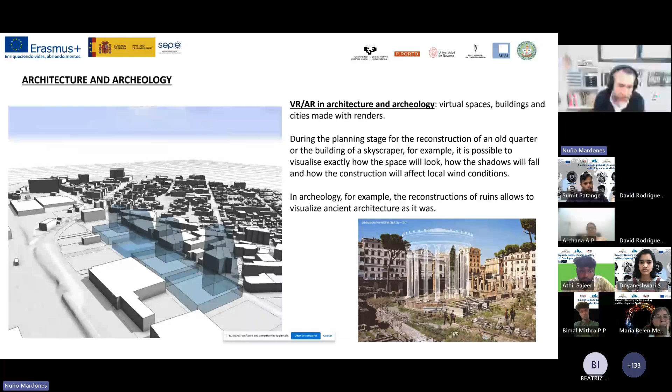As you can see in the left image, we can put new buildings in an existing urban context, and it's obvious that we can walk through this new street, this new development, and see different aspects like the sun on the street, the shadows that buildings cast on the street, and the buildings of the surrounding environment. We can experience and analyze these different aspects.

But this is just an urban design option - just the design of the buildings in an urban context. Of course, in the case of archaeology, or ancient cities, we can reconstruct buildings or parts of the city, and visualize this architecture and this part of the city as it was in the past.

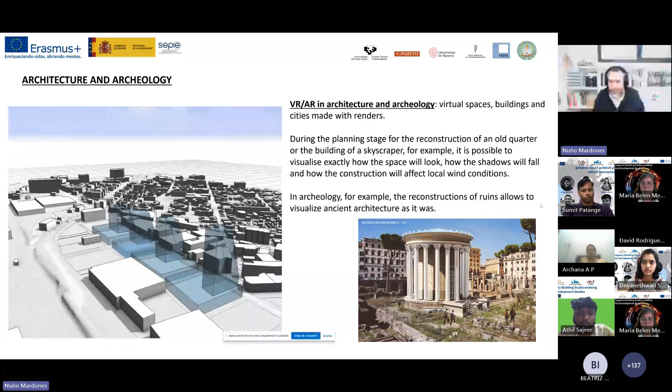So this is, I think, the most general possibility that virtual reality offers to urban planning. The other usual possibility it offers is the management or creation of smart cities.

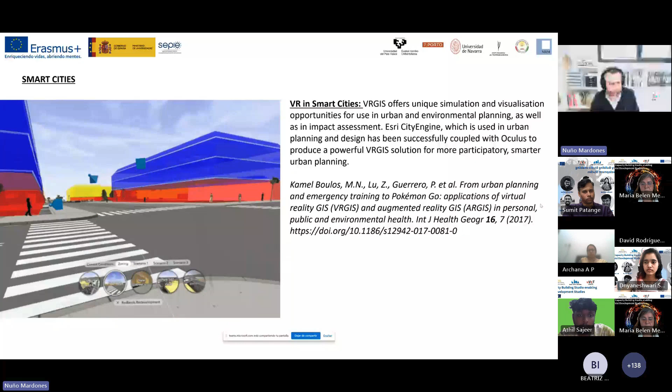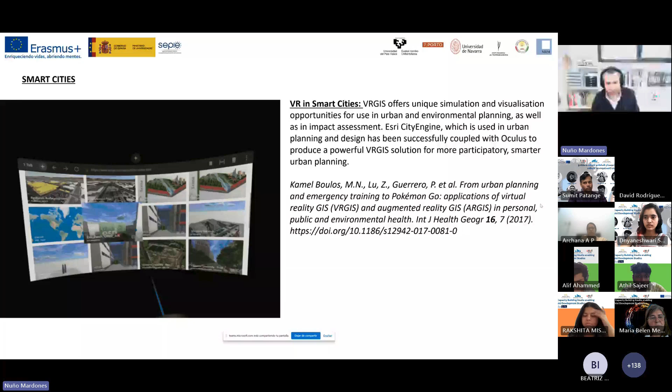In this case we have one technology I'm going to show you, the GIS system, because the GIS system offers new possibilities. It's not just the design of an area, or the design of buildings in a concrete area - it offers the possibility to overlap different information about this environment, and this also allows us to simulate and visualize part of the city, taking the point of view of different aspects.

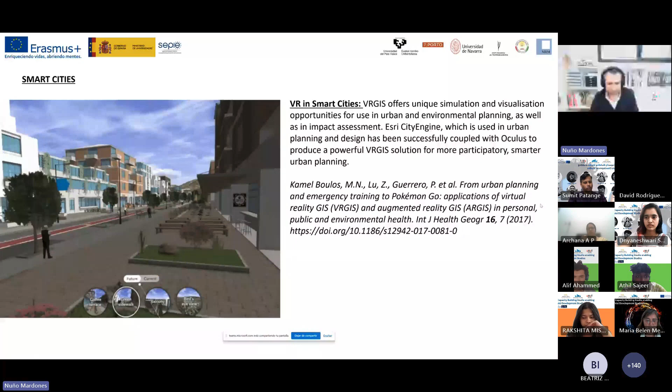So this is the part I'm trying to explain to you in more detail, because I think it's the most powerful possibility that virtual reality offers to urban and territorial planners.

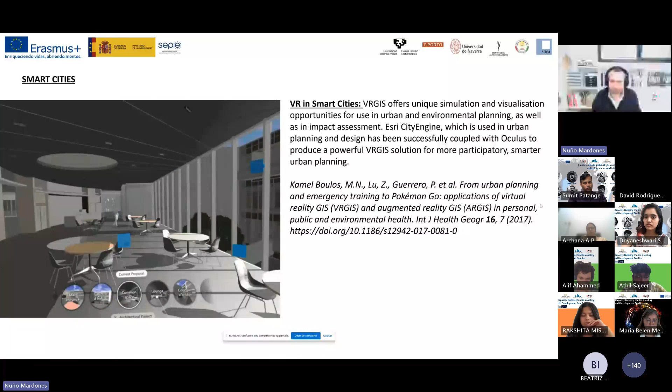One of the most important things I'm trying to explain is that, as many of you might think, architectural design and urban design are not the same. Urban design is not just the simple sum of different buildings put into an urban layout. Not exactly - urban spaces or cities are more complex, with much more circumstance than a simple sum of different buildings.

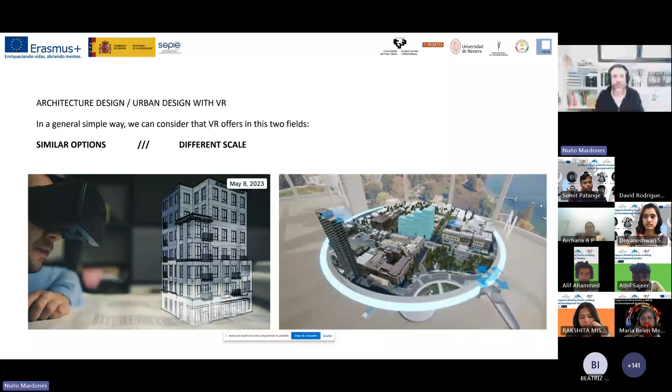So virtual reality offers a similar option, but at a different scale - it's not exactly the same. In the case of urban planning, virtual reality offers much more possibilities for visualizing, analyzing, and understanding the urban context.

This is because we can create new urban developments and experience how that could be - we can experience the life in these areas.

And of course, this offers the possibility of making decisions with more data, and in this way there are aspects I think it offers for urban planning that it doesn't offer for architectural design. One of these is the improvement of decision making with much more information - not just information about the building aspect or the shape aspect of the city, but more information about the management, about the uses of the different parts of the city, etc.

The second thing is that it encourages citizen participation. In our days, citizen participation or public participation is a really important aspect of urban planning and urban design. So this encourages participation by offering more immersive possibilities of understanding how the future city is going to work - it's an important tool for these actions.

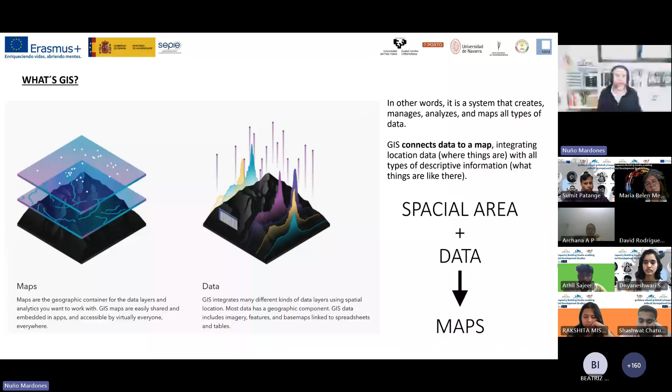This kind of program or software is based on the creation of graphic data. Graphic data are basically objects or spatial data, as you can see in the image on your left. This is spatial data, which could be a point, a line, a polygon, grid, etc. This is what traditional cartography offered us: object or spatial information.

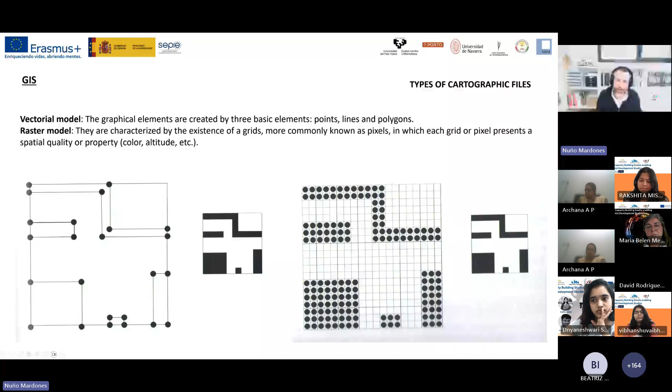This is a grid, and in each pixel or square of the grid, we can represent different spatial qualities or properties like color, altitude, temperature, etc. In this case, we have the grid, and we just have to color in black all the squares to obtain the final image. This is important because we can obtain all kinds of information in these two different models.

What I show you in this slide are two maps that we created in my office for a golf club in Spain. In the left image, we have topographical information. This topographical information is vectorial information, just a combination of contour lines with the different elevation of any part of this area.

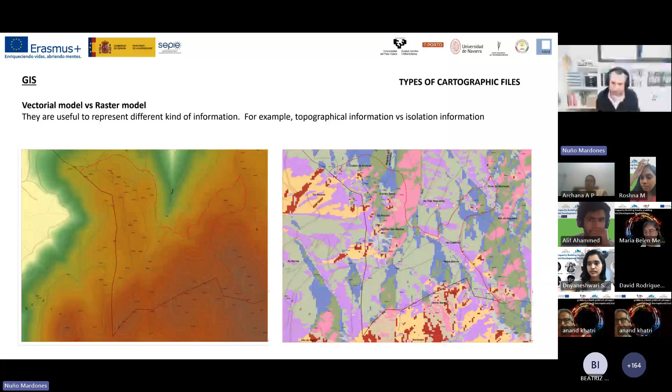In the right image, you can see isolation information. This isolation information is created per square meter of the soil, so this is a grid model. In each square, we have the information of the sun orientation, and we can combine these two maps in one file. This is another important thing that GIS models offer.

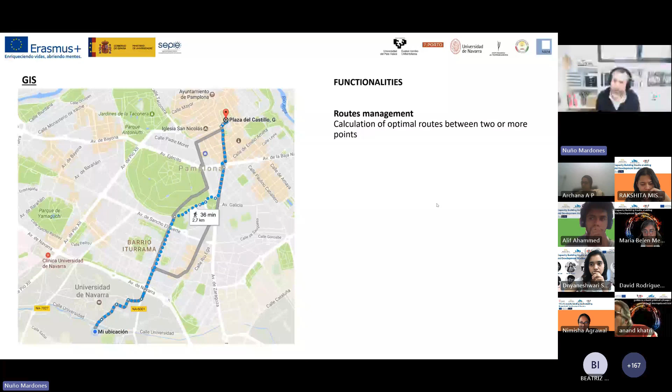Another possibility is the creation of models. This is the same example of the golf club in Spain, and we can generate a model to simulate the movement of terrain, where we have to remove soil, and in which part we have to put soil.

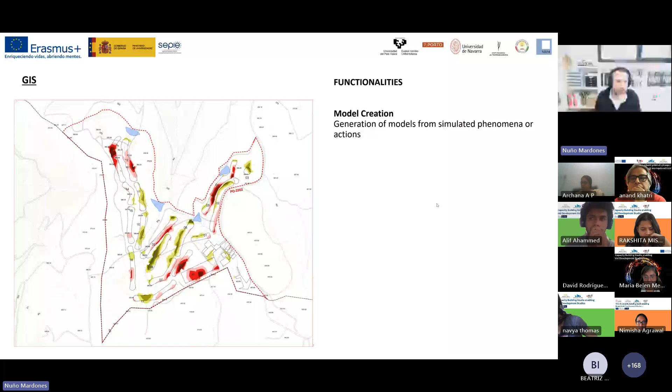Now, what virtual reality offers to this software is, I think, really similar to the options offered for architectural design. The first one is that it offers new ways of interacting with urban information, because it allows a much greater degree of immersion. All inhabitants could get inside these models and experience, in first person or bird's eye view, the new development of the city.

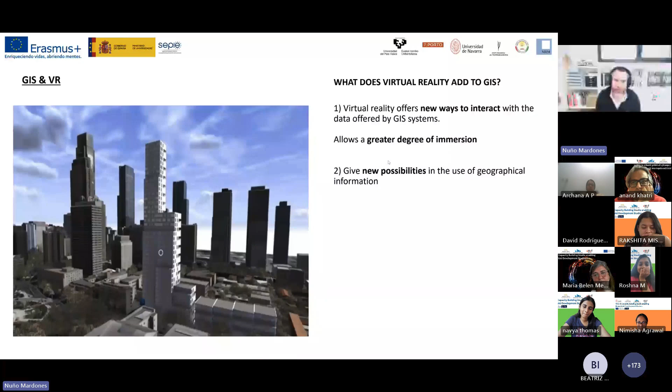So, of course, this gives new possibilities in the use of geographical information. One of these possibilities is not just designing information, it allows offering, analyzing, studying, and discussing data of different aspects, like social, economic, and environmental aspects, in different ways.

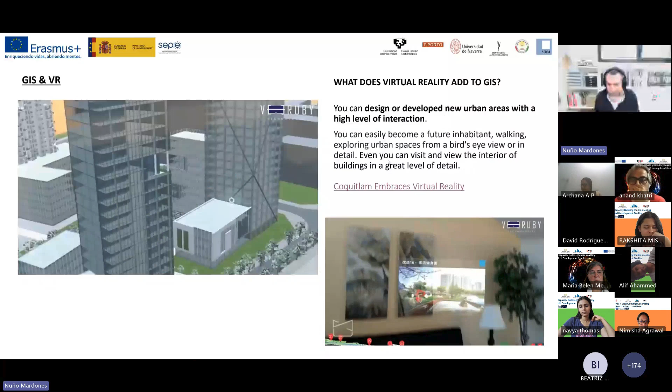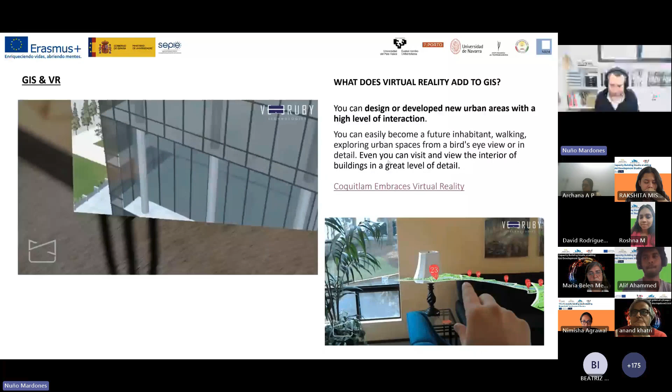Of course, you can design new urban developments, and in this new urban development you can add more information. You can add images, you can add information about the meters squared you can build, or a lot of things that you can explore with this combination of GIS system and virtual reality.

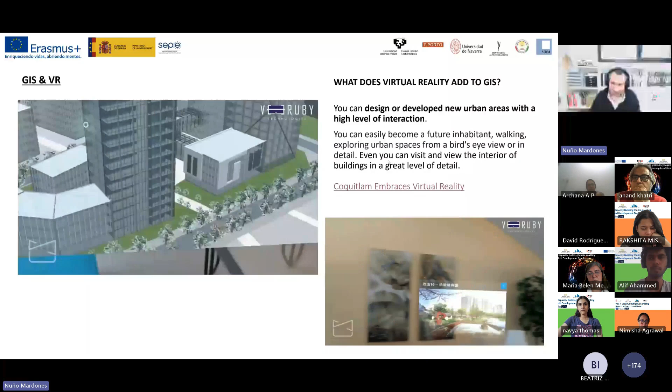Now I'm going to show you some videos about different options of this kind of technology.

There is no sound, Nuño. There's no sound. I think it doesn't matter because there is just music, so I can explain it if you want.

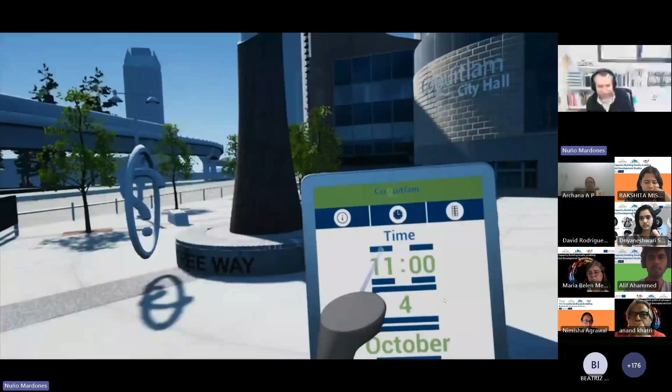This is an example of a Canadian city that used virtual reality for the creation of a new urban area. This is a video where they explain how this new part of the city is going to work.

Another important aspect is how this kind of technology can improve citizen participation in the process of urban design. I don't know about India, but in Spain and Europe, public participation is really important, and also, for example, in the British system, all new urban developments require a project that you have to create in combination with the inhabitants and with the local government.

So I think this is one of the most important things, because people have the possibility of understanding, in a really visual way, how this new part of the city is going to work. Now I'm going to show another video about a Polish city, about the implementation of this kind of technology in the process of new urban design.

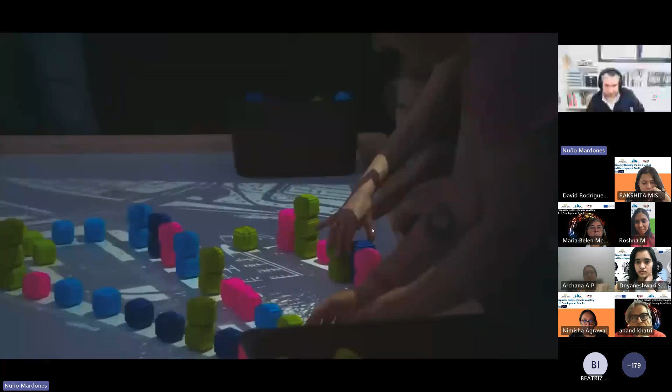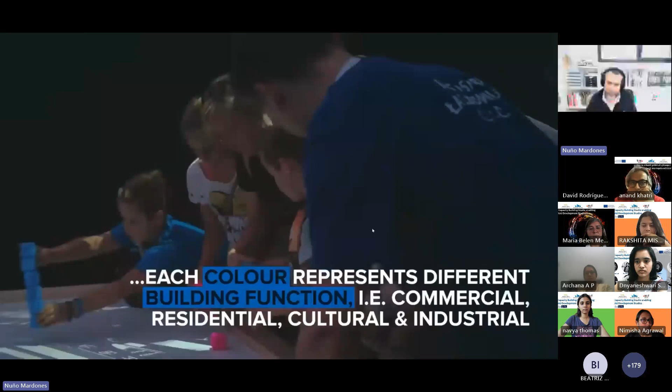In this case, as you can see, all inhabitants have the possibility to create the design of the city. There are different, I don't know how to say, different blocks. They can put the blocks in different zones and create the virtual recreation of this area in real time. So the virtual reality offers this kind of possibility.

I think we have to take this pretty carefully, because the people or professionals who know how the city is going to be designed are the urban planners, and we can have some problems if we leave the decision to the people.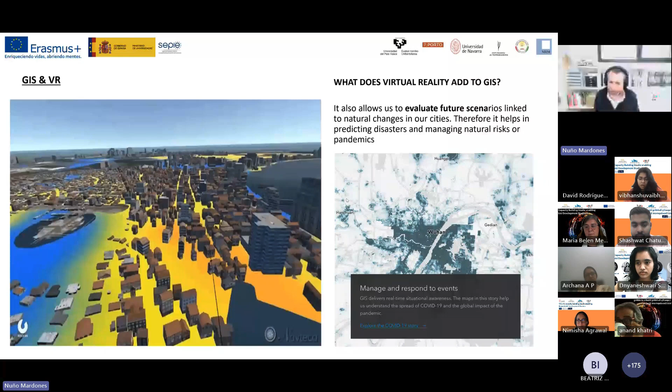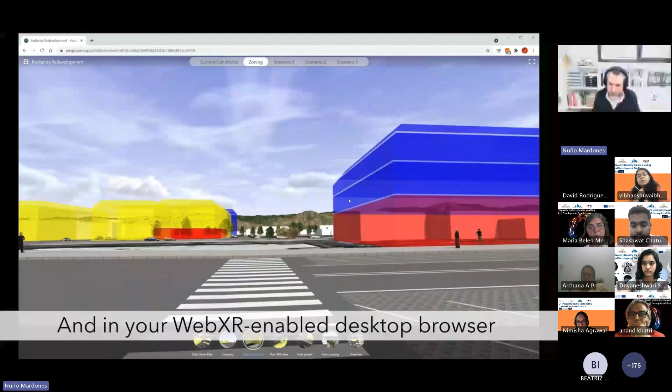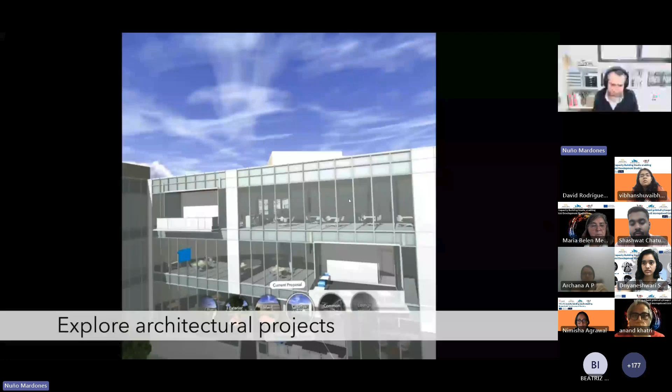Just to summarize this part of the presentation, I'm going to show you another video. This is a video about the most important, or the most useful, GIS software - ArcGIS VR or ArcGIS CityEngine, which offers a lot of possibilities for planning or managing the city. You can see in the video the possibilities of understanding the different uses of different floors of buildings. You have an application to see different viewpoints of new buildings.

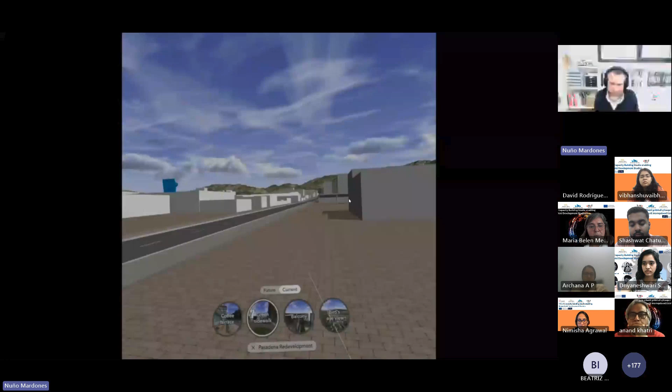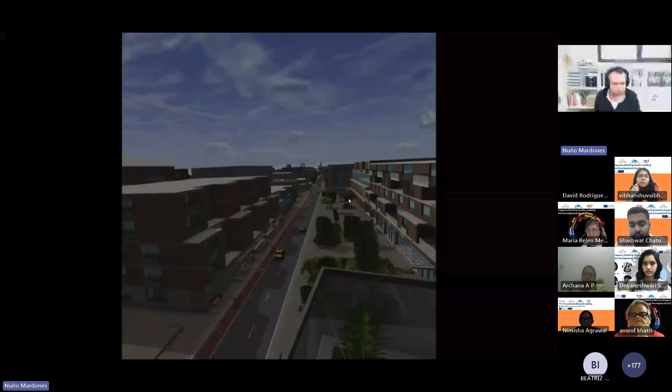You can also get into the buildings and see the outside environment, see how the sun impacts your building. You can compare present and future conditions, and also, as you can see, you can evaluate different scenarios and different possibilities for new parts of the city.

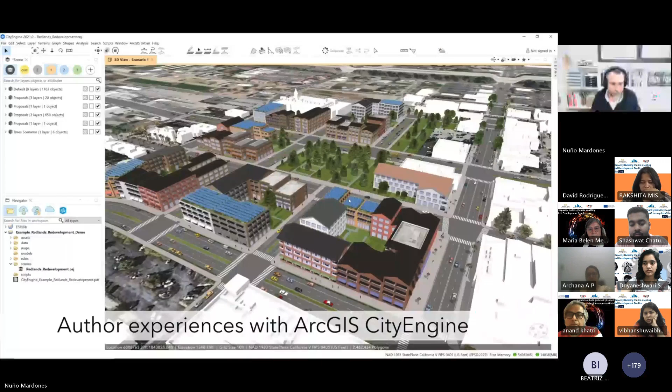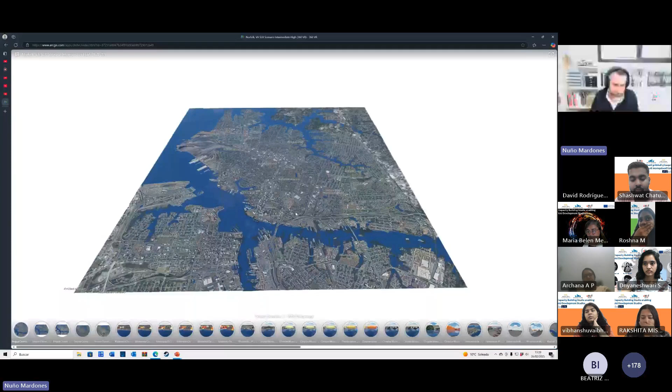For example, this is an example of a city and the recreation of sea level rise conditions. You can experience different moments with different information. This is totally free, so if you're interested, you can explore it, and there are a lot of projects about virtual reality and design.

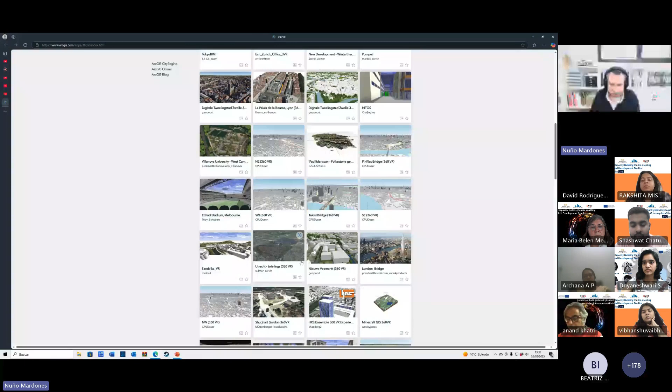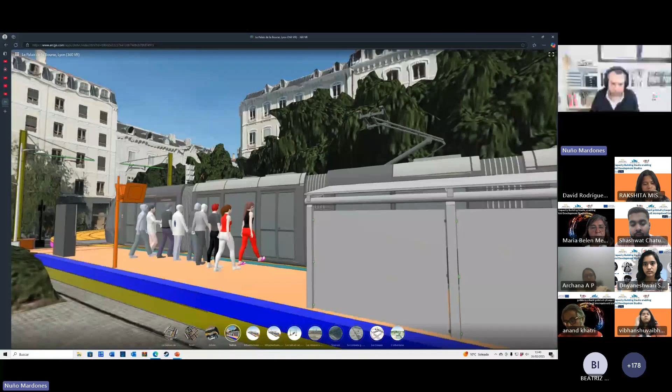For example, I want to show you a concrete example of the introduction of a new tram station in a city. You can see in plan view what the impact is going to be, and also you can see it in 3D - it's not just an image, so you can move and interact with this new development.

Now I'm going to move on to the other part of this presentation, about cultural heritage management. As I explained at the start, in Spain we have a serious problem with our cultural heritage, because we are the third country in the world with the most cultural heritage, and of course we don't have enough money and enough uses to get all these buildings in use.

The most important thing with this kind of issue is that all buildings have a use and can expand their life. So one of the most important aspects of preserving and disseminating this cultural heritage is to improve people's identification with this kind of building and monument. Greater knowledge of this increases the desire for conservation. Virtual reality offers a lot of possibilities for this dissemination of cultural heritage.

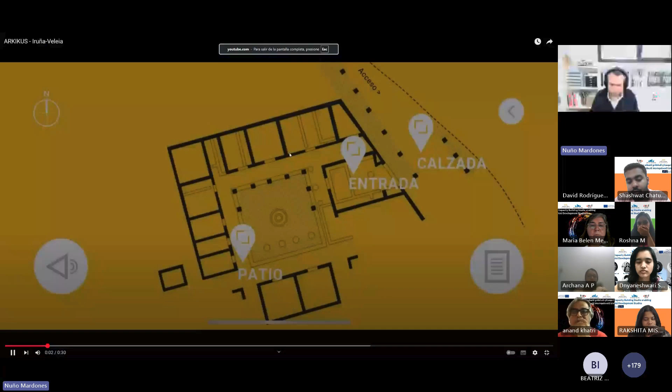Now I'm going to show you this video. This is a video of an application created in the Basque Country in Spain, showing a historical monument in two different ways. We can see in virtual reality with your glasses, you can move your head, and what's important is that you can see this monument in the past and in the present. You can see these other images - this is an example of a church, and you can see its original aspect in the 14th century, and in the last moment...

We have lost the video. Can you see the presentation or not? The presentation, yes, but the video - no. The video is too short. It's too short. No, take it.

Okay, thank you. As you can see, in the past, in the present, and of course it also gives us the possibility of showing these buildings with a future design, with a future use.

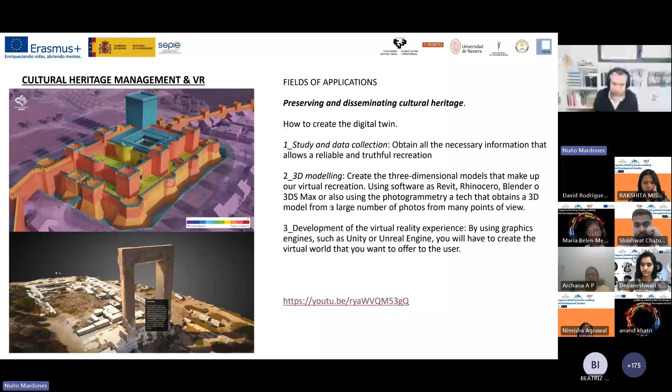Another important thing for preservation and dissemination is how we can transmit this information to the youngest people of our societies. I think a lot of new platforms, gaming platforms that are usually really close to our younger generations, have some experience with the recreation of cultural heritage. I'm going to show you the example of the Steam platform.

Steam platform, I think, is one of the most popular applications for gaming in Europe. This is an example that you can experience with your 3D glasses, of the recreation of Notre Dame.

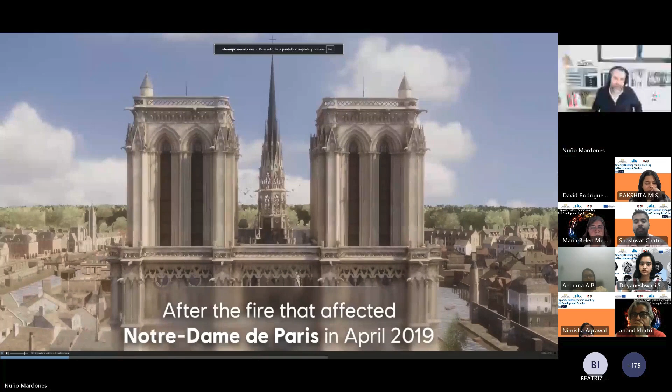One thing I think is really important is that the fight of the urban planner is not just with other architects or public administrators. You have to put the focus on society, and all of society has to be involved with these problems of the management of our cities.

Of course, this combination of virtual reality with cultural heritage management is focused on tourism, on how people know and discover our cities.

This is an example of a virtual reality video on YouTube, a GIF about Machu Picchu, and I'm going to show you another video about the city of Sintra in Portugal. What is important about these videos is that you are an active tourist.

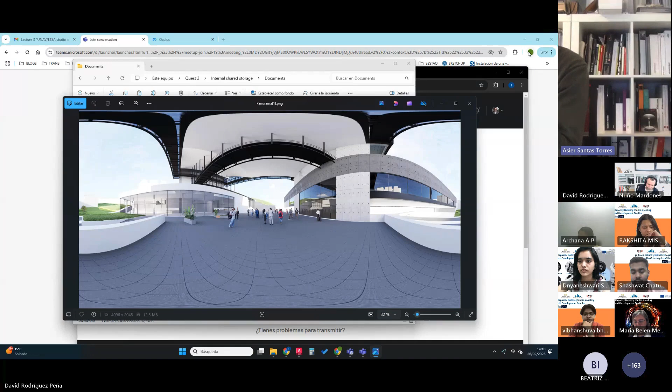I have to say previously that once you have connected the Oculus to the computer, you have to be very careful with only one thing, that we didn't do in the last session. Once you customize your Oculus for the first time, you have to enter as a user with a Facebook or a Gmail account, personal account, or Instagram, and you cannot change this user in your computer. So you have to work with the same user. In this case, I am working with asantas@unav.es, and inside my Oculus, the user is the same.

So if you do this, you won't have any problem connecting your glasses to the computer, and also you won't have any problem casting your glasses through the web page that we showed you in the last session. That is this one, oculus.com casting.

I am going to now put on my glasses, and I'm going to start casting what I am seeing. Let's try, okay, as I did last time. Can you see my screen? Yes, perfect. So I had two different users opened with my browser. I didn't realize, so I've closed one of them, and I'm working only with my asantas@unav.es account. So this is what I'm seeing now with my glasses.

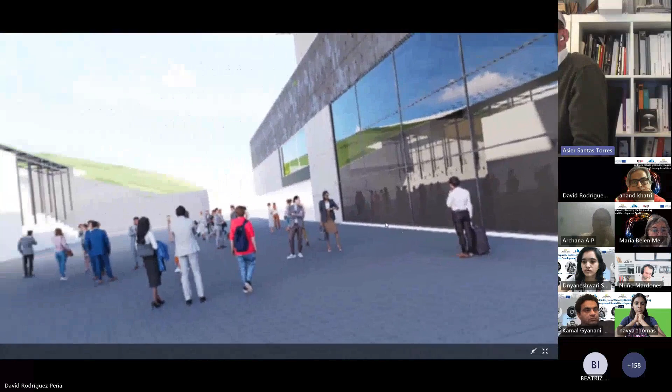In this menu bar, you will have to look for this icon called Files. Then in Files, the 5 images uploaded from the computer will appear, and it's so easy - just picking the image, the glasses automatically put you inside the model.

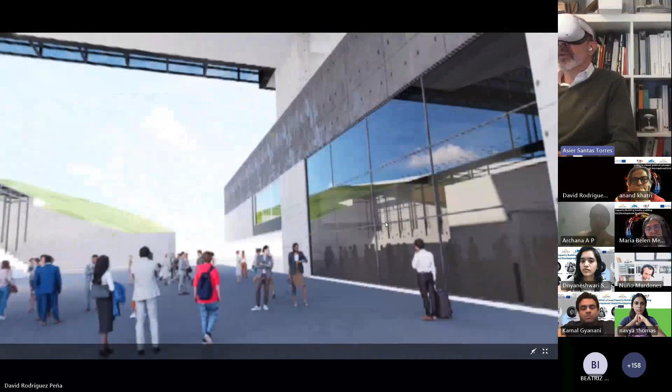This is me in the virtual reality of this static image of the model. This is a rough model, only with some people and not so much materials and furniture, but the idea is that you prepare, during all these days or weeks, a good model with SketchUp and another software, V5.

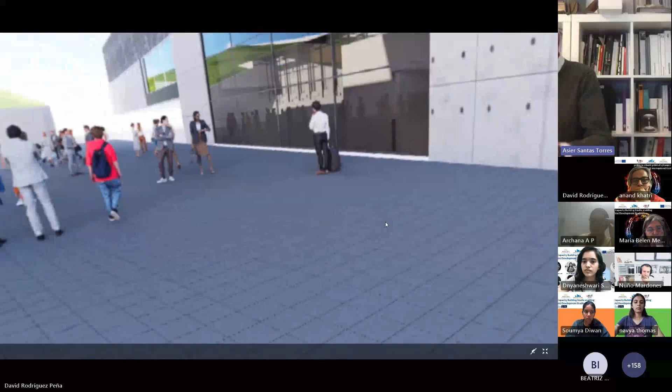I repeat, for now you can only prepare static images, but I think it's very informative and useful to show people what you want to propose.

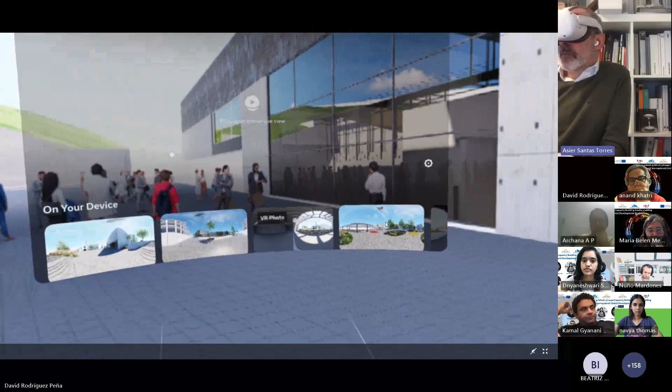Once you are in one photo, the rest of the photos appear, and then you can move in this menu bar with the joystick.

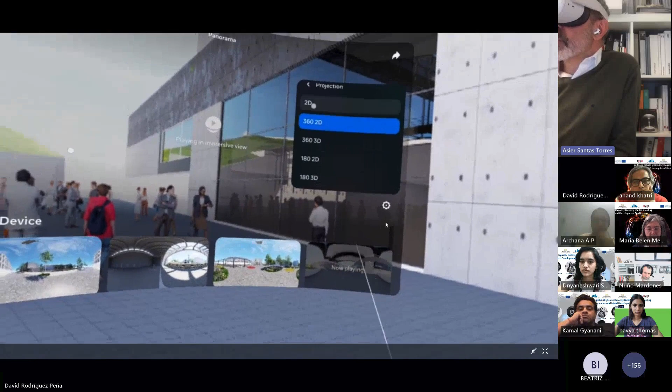Be careful with this option, because the projection of the image cannot be 2D, 360 3D, or 180 2D - if you change to this vision, you exit the image. Let's see, let's move this here.

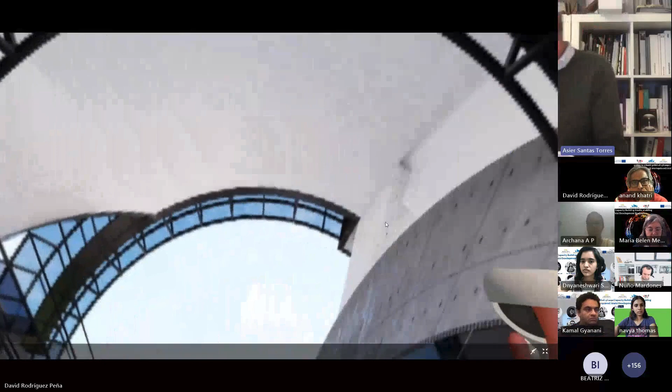If you go to this projection, 360, what you're going to see is these wrong images. So you need to go back to the options projections and choose this one, 360 2D.

Once there, you will enter correctly into the visualization of the 360 image. The other images that I can show you are prepared here in the office.

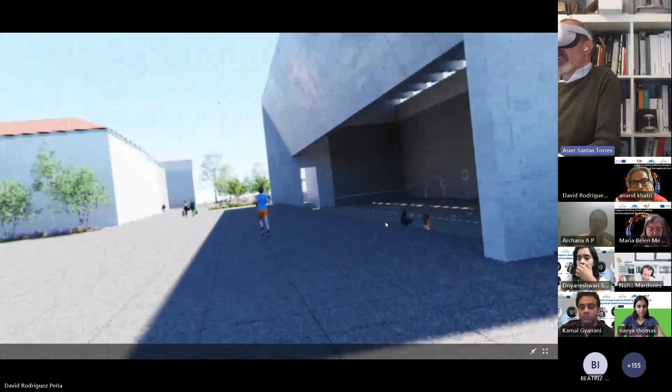As I said, this is a sports facility that we have designed in Bilbao. We call it fronton, with a piazza - a square with an existing building that is a church - and we have prepared 5 images for the client.

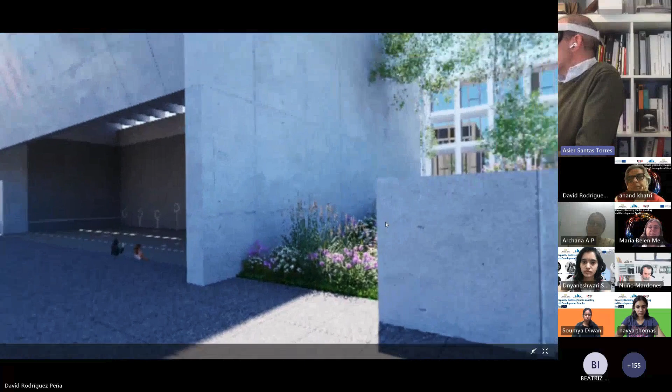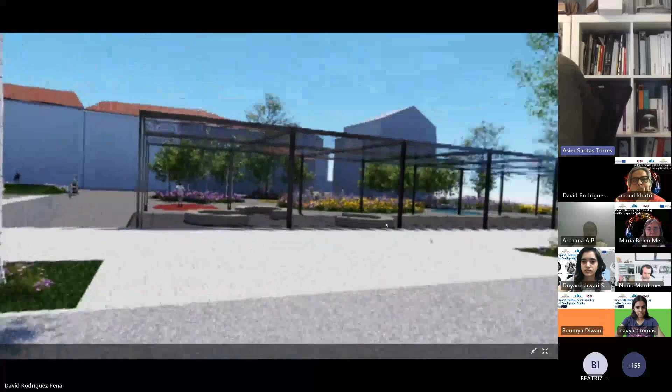This is one of the outside, the urbanization. This is another one, with the street, the rear part of the facility, small canopy with a garden, trees, etc.

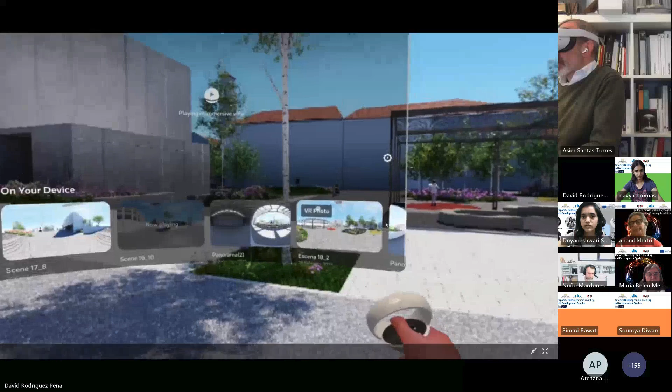The other one is this one. We are now beside the canopy, in the middle of the garden with the plants that we want to plant, the trees, etc. Finally, just clicking this button, the menu appears.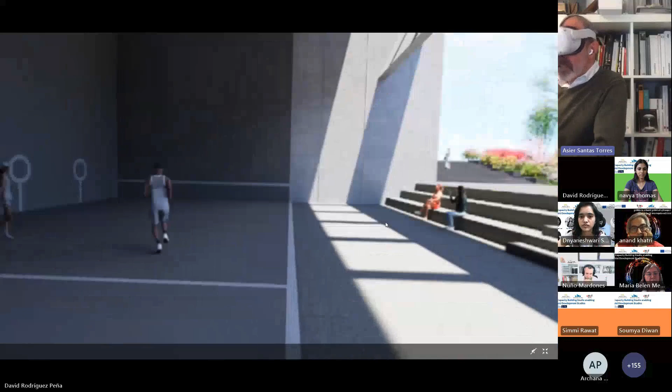We go inside the building, the facility, and you can see you can place yourself inside the building. This, for example, was very useful for the civil engineer and the structural engineer.

We showed them the plans, sketches and cut plans, but we showed the project with the glasses, and once they came into the building, they completely understood the ideas of the structure we wanted to work with them.

So once they are placed here, they have more information about the height, the materials, the light, etc. Of course, you can work with different materials, and you can work with different lights.

This, for example, is midday, night, midday light, etc.

As I said, we are starting to use this kind of visualization. There is a lot of ways to explore, and we have realized that this is a new tool useful for different visualizations or working with different agents and clients.